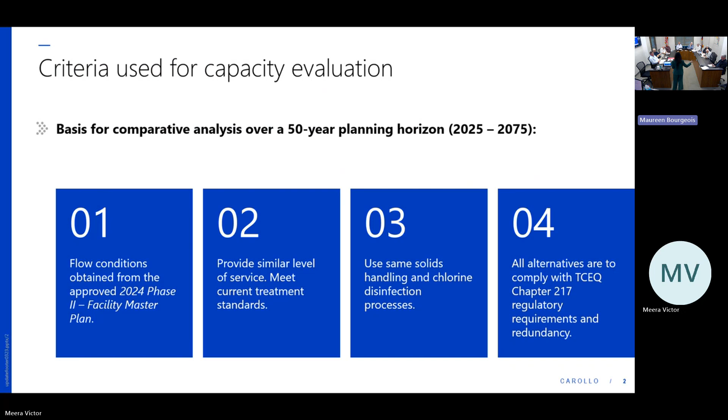Lastly, all alternatives would comply with Chapter 217 of TCEQ's regulatory requirements for redundancy as well as capacity. I also wanted to make sure everyone understands all four alternatives are being looked at on the basis of a 50-year planning horizon, from 2025 to 2075, for each alternative, from alternative one, which is repair in place, to alternative four, which is the MBR option.

Let's talk a little about the applicability of Rule 217 -- I know there were questions on when it applies and when it does not. This comes directly from TCEQ Subchapter A, Rule 217.1: treatment units that are altered, constructed, or re-rated with plans and specifications received and approved by the executive director after the effective date, which in this case was August 28, 2008, of the amendments to this chapter -- the 217 chapter.

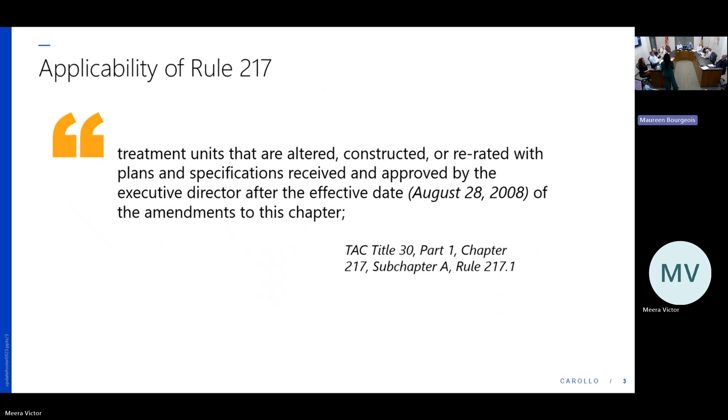And what does alteration or 'alter' mean? This is the definition out of TCEQ's Chapter 217.2: whenever you're replacing a treatment unit in a treatment plant, or modifying a treatment unit, whether it's the capacity, the intended function of the process, the mode of operation, or the configuration and design changes -- any of these major design assumption changes automatically triggers Chapter 217 rule implications versus the grandfathered Chapter 317 rule.

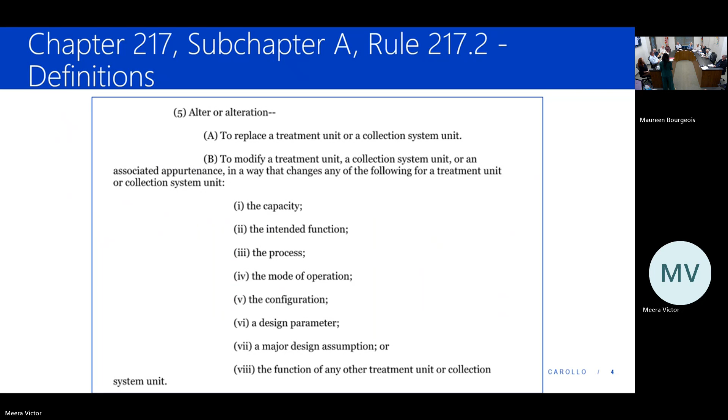So when we started looking at the existing wastewater treatment facility number one, our first task was to assess the treatment plant. There were questions about what the assessment includes. The assessment includes both the condition of each asset at the wastewater treatment facility number one, and also the capacity of each of the assets.

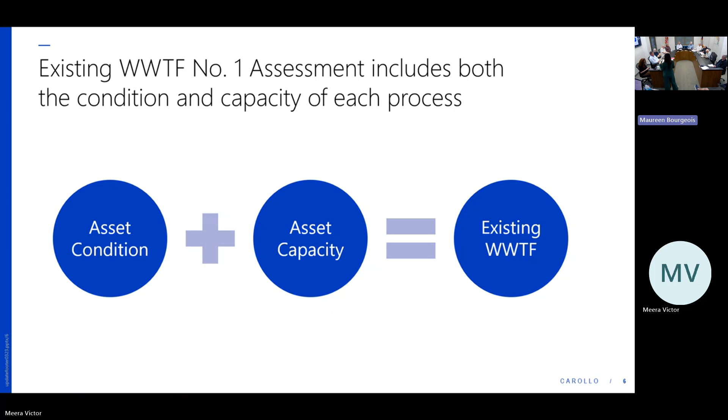When I talk about capacity, I'm talking about both the hydraulic capacity -- basically how much water can move through the plant or each process without submerging the weirs -- and the process capacity of each process area, to make sure the wastewater is getting treated to the right standards as designed by that particular process. So taking into consideration both condition and capacity is what we look at for the entire assessment of the wastewater treatment plant.

So let's first talk about the existing hydraulic capacity of the plant. This graph shows you the historical 2-hour peak flow from January 2016 to January 2025, over the last 10 years. You can see 7 instances where the flows have exceeded the permitted 18 MGD flow for the wastewater treatment plant 1 permit, and 4 times it exceeded over 24 MGD.

On the left-hand side, you see SJRA's letter. Every time there's a flow that exceeds the permitted flow, SJRA is required to send a notice of non-compliance letter to TCEQ. That's an example from the May event, where the flow was 28 MGD at wastewater treatment plant 1 on May 2nd, 2024. That's the letter that went out to TCEQ for the non-compliance.

Historically, as you can see from this graph, even though the average flow at the plant has been 3.1, 3.2, 3.7 over the last 10 years, the current peaking factor -- the peak 2-hour flow -- is 7 to 8 times the current average daily flow. So I wanted to emphasize that the 28 MGD that Freese and Nichols' master plan recommended is a real number; the plant is seeing that high peak flow regardless of the average daily flow. The plant is seeing very high, large peak 2-hour flows.

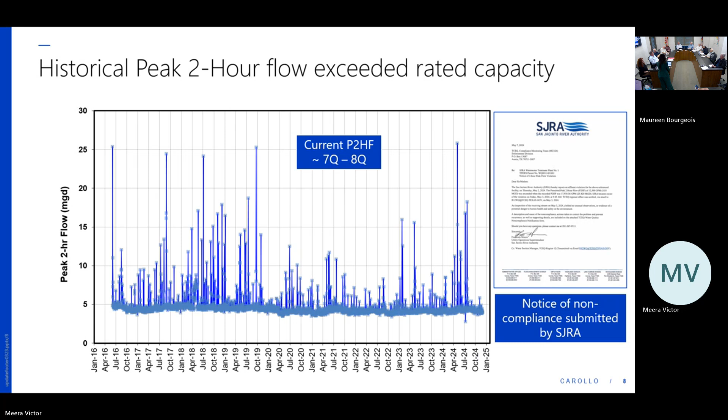So when we look at the hydraulic capacity evaluation, we used Carollo's own hydraulics tool, like any other engineering firm has. We use the hydraulics, which is an Excel-based tool that calculates what the water surface elevations would be as the water moves from the stream.

We start at the back end, the stream, water surface elevation in the stream during a 100-year flood elevation, and walk our way back to the head of the plant. And we follow the flow of the plant.

This table shows you different process units for the wastewater treatment plant and the hydraulic capacity of each of those process units and where the deficiencies are. The last column shows you the order of submergence, or the order of failure, which is the first weir to get submerged.

As you can see from this table, at 15.7 MGD, the secondary clarifier effluent weir gets submerged, which means there is a bottleneck between the secondary clarifier and the filter influent. After that, at 17 MGD, the aeration basin splitter box weir is submerged, followed by 19.3 MGD, the effluent meter, the entire parshall flume is 100% submerged.

So these are the calculations we do to come up with the hydraulic capacity of each of the process areas as the water flows through without submerging the weirs.

What do you mean by order of submergence? Can you explain that a little? So which is the first weir, or which is the first process area that gets submerged?

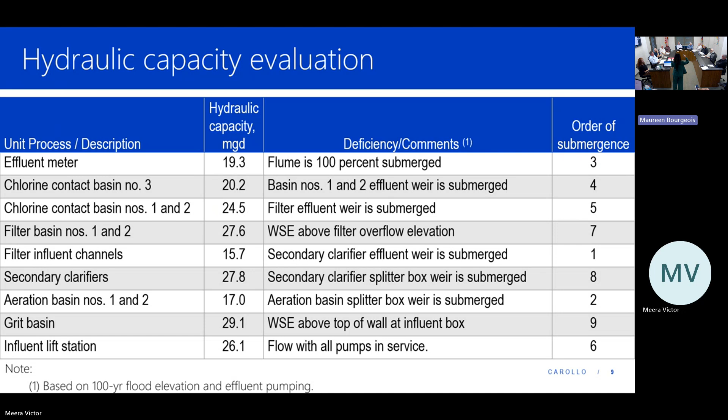That 28, is that a 2-year, 5-year, 10-year average, or what? It is the peak 2-hour flow. Peak 2, but over what period of time? Per day, the peak 2-hour flow at the plant at any given point.

So that was the hydraulic capacity. Now I wanted to walk you all through the existing process capacity, and I'm going to go process by process. There is a lot of data on each of these slides, so bear with me, please.

We'll start with the water as it comes through the raw influent screening, the pre-treatment. That's what it's called in SJRA's CMMS system. It's a mechanical screen, a Headworks International manufactured screen. It was installed in 2013, and it's one screen with a screen opening of 3/16 inch.

The capacity, based on the manufacturer's recommendation and their manual, is 24.1 MGD. That means 24.1 MGD can flow through those screens while effectively taking out the rag that it's supposed to take out.

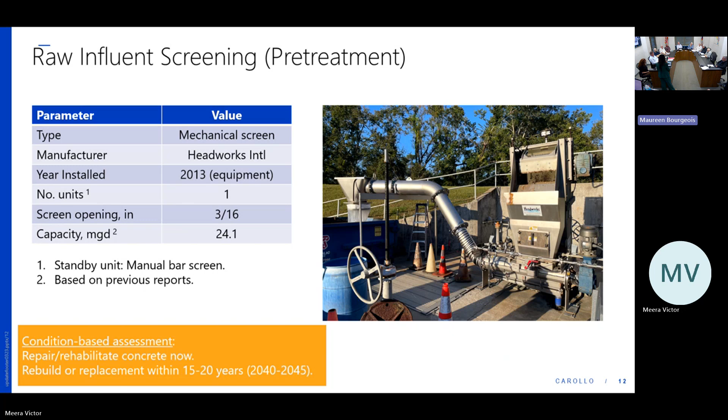Going on to the raw influent pumping, or the lift stations, there are 2 lift stations at the wastewater treatment facility, 1 and 2. They are both non-clog centrifugal pumps. Flygt is the manufacturer. The year installed at lift station 1 was 2001, and the most recent repair done at lift station 2 was 2019.

There are 2 pumps at each of the lift stations, and that's the GPM capacity of each of the pumps, along with the firm capacity of both lift stations together.

When I say firm capacity, TCEQ defines firm capacity as the capacity with the largest pump out of service. What is the capacity of pushing water out of that lift station with the largest pump out of service? The firm capacity of the influent lift station at wastewater treatment plant 1 is 16.1 mgd.

The conditions are shown in the orange boxes. The MCC and VFDs need to be replaced in a 10 to 15 year timeframe. Instrumentation control replacements are recommended within 5 to 10 years, and pump replacement also within 5 to 15 years. We also recommend a performance evaluation on those pumps, because the information we have is based on the O&M manuals and plate data from the pumps, but we do not have drawdown curves for those pump stations. So we recommend that. The plug valve replacement is within 15 years.

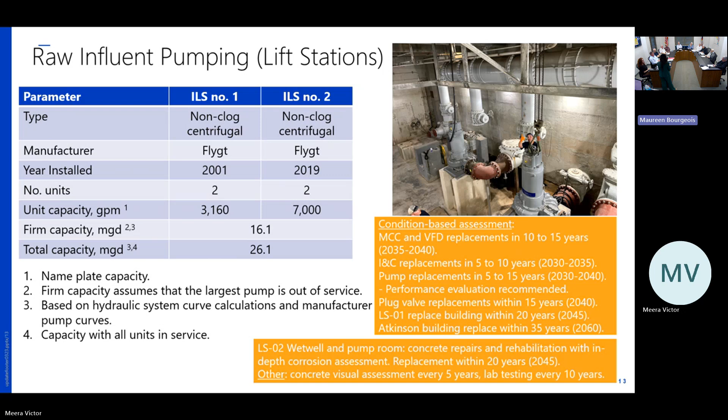The building itself would need to be replaced in 20 years. But as discussed at the All-Mud meeting, the wet well is in very poor shape. We only looked at lift station number 2, but we assume the same is true of lift station 1 because it's a very similar corrosive environment. The concrete repairs and rehab would have to be done right away, and then full replacement would be looked at in 20 years.

For the influent screening and lift station replacement, as you've already heard multiple times, there are extensive concrete repairs needed at the lift station and at the channels of the influent screening facility. We estimate about 6 months of repairs because the plant has to shut down. They have to do scaffolding to go down the deep lift stations, do the concrete repair coating, and concrete needs curing time. So it does take a long time.

While all this is happening, the plant has to stay in operation. They only have one screening facility and lift station, so if they take it down for repairs, they now have to provide bypass pumping to pump directly to the aeration basins.

The existing electrical building, which I mentioned last time at the All-Mud meeting, does not have room for an additional VFD. As you already saw, the existing lift station does not meet the firm capacity needed. So to accommodate that additional pump, you need a VFD, but the existing lift station electrical building has no room for it, so we would have to build an additional building for the VFDs.

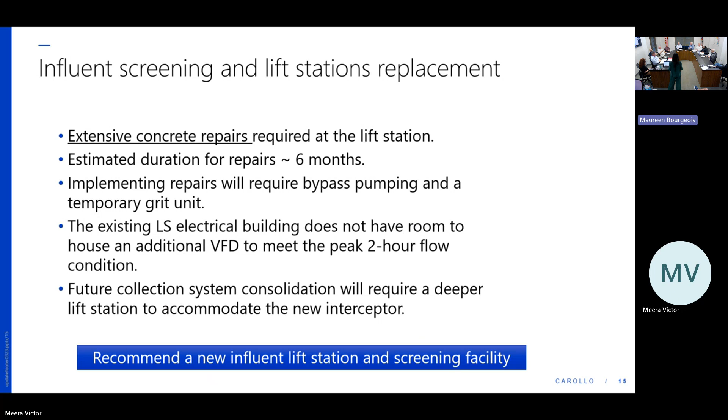Grit removal is a forced vortex system by Smith and Loveless, installed in 2017. There is only one grit basin, which means SGRA cannot take the grit system down for repairs, cleaning, or any maintenance purposes because they cannot shut it down. That is the only unit they have.

The capacity of that grit system is 20 MGD, which means anything over 20 MGD, the water can move through, as we saw in the hydraulic capacity analysis, but the grit will not be removed. Anything above 20 MGD, the grit removal efficiency drops considerably.

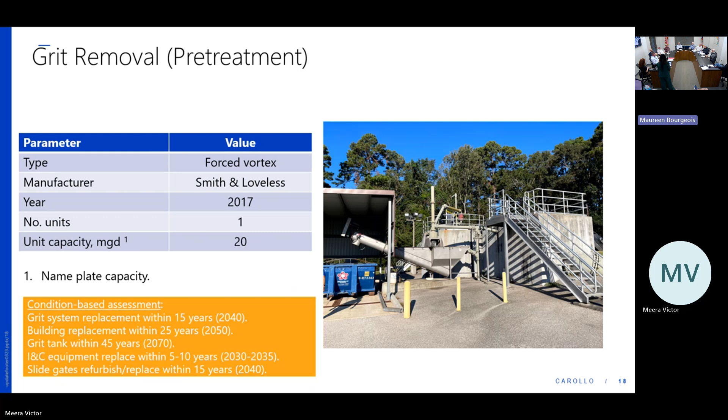For the condition of the grit system, we recommend a 15-year replacement. The building would be replaced in 25 years - that's where the grit conveyor is. The grit tank concrete structure itself would be replaced in 45 years. Instrumentation and control equipment needs to be replaced within 5 to 10 years, which is typical for all I&C components. All the slide gates need to be rehabbed or replaced in 15 years.

As I talked about, the hydraulic capacity allows the grit system to move water through, however it cannot remove grit efficiently above 20 MGD. So there is a gap in the capacity. When you're moving 20-plus MGD, you're under some kind of event - is grit picking up or going down? Usually grit goes down, and at high flows you'd see a reduction. Our recommendation for adding a new grit system, a second basin, was for redundancy purposes, because right now they cannot take down the grit system for any O&M purposes.

How do they handle that now? Since they can't take it down, they must have a way.

We take it down and bypass - we let all the grit just go through the pipes and the pumps and settle out in the basins. There's a bypass valve you flip, with piping to go around it, because it's inevitable - something's going to happen, it's mechanical. As the grit goes through all the pipes, it causes erosion, so through the pumps and the basin, they have to clean it out.

So we are recommending a new second grit system as part of this study for the existing plant, again for redundancy purposes.

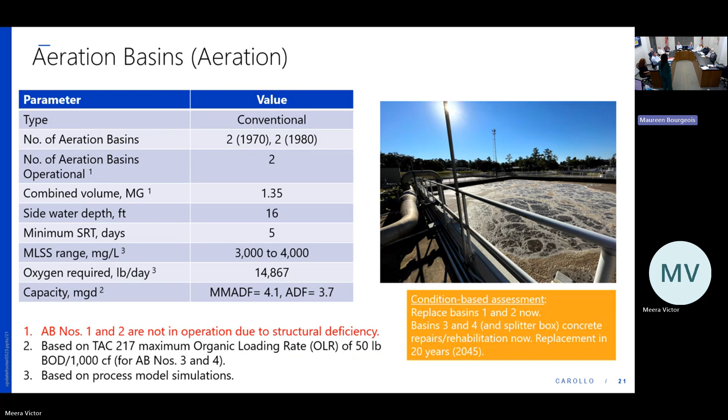They've been out for a while. So how are they meeting current capacity if 1 and 2 are down? They're meeting capacity because the flows are lower, at 3.1 MGD average flow. So the plant isn't meeting the capacity to handle 7 or 7.8 MGD. If the flows go anything above 3.7, they would have challenges at the plant.

The aeration system uses multi-stage centrifugal blowers at aeration basins 3 and 4, by Lamson. There are 3 aeration blowers. The unit capacity at about 7.5 PSI is about 4,000 SCFM, which is the flow rate of air, and the process air required is about 8,000 SCFM.

This is based on the existing diffuser in our modeling, since they currently have ceramic disc diffusers in basins 3 and 4. The current aeration system for 3 and 4 is sufficient for those basins, but for aeration basins 1 and 2, when they are replaced, we will need additional blowers.

The MCC at the aeration basins needs replacement in 10 to 15 years. Electrical replacement within 15 years. Instrumentation and control within 5 to 10 years, and the blower and motor for aeration basins 3 and 4 would be within the next 20 years.

When was the last time 2 was run? Aeration basin 2 was operated, have you... say that again. When is the last time aeration basin 2 was operated? Probably the same time 1 was. They were both taken down around the same time, 10 plus years.

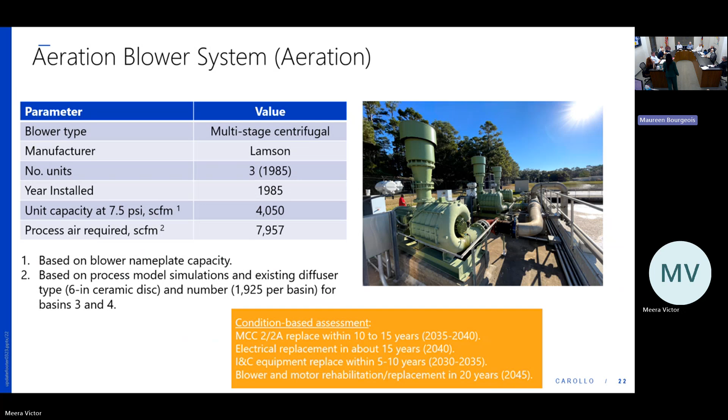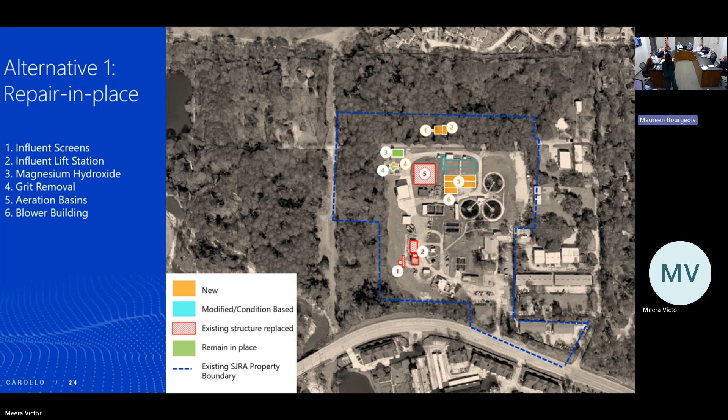This is the site plan showing the aeration basins. The red box with checkered hatching, number 5, is the existing aeration basins 1 and 2. That would be replaced by the new basins shown in orange, also number 5, along with a new blower building for aeration basins 1 and 2.

Moving on to secondary clarifiers, there are circular clarifiers, 3 of them, by Envirex, the manufacturer. 2 clarifiers were installed in 1982 and 1 was installed in 1994. All 3 are 87 feet in diameter with a side water depth of 10 feet.

When we do our process calculations, we look at several different ways to calculate the peak 2-hour flow capacity through the clarifiers. First is the hydraulic retention time, HRT, of 1.8 hours. The peak 2-hour flow capacity using HRT based on TCEQ's chapter 217 is 17.3 MGD. The peak 2-hour flow using the surface overflow rate of 1,200 gallons per day per square foot of the clarifier is about 20.8 MGD.

However, because they both were lower than what our desired 28 MGD was, we looked at the state point analysis, which looks at the SRT, the solids retention time in the clarifiers, and we came up with 21 MGD capacity of the clarifiers.

The condition-based assessment: the I&C equipment have to be replaced within 5 to 10 years. The butterfly valves within 5 years. The concrete repairs, as was talked about in the last presentation, need to be coated and repaired for all 3 clarifiers. The full clarifier replacement would be done for the 2 that were installed in 1982 in 20 years, followed by the last, newest clarifier in year 2065.

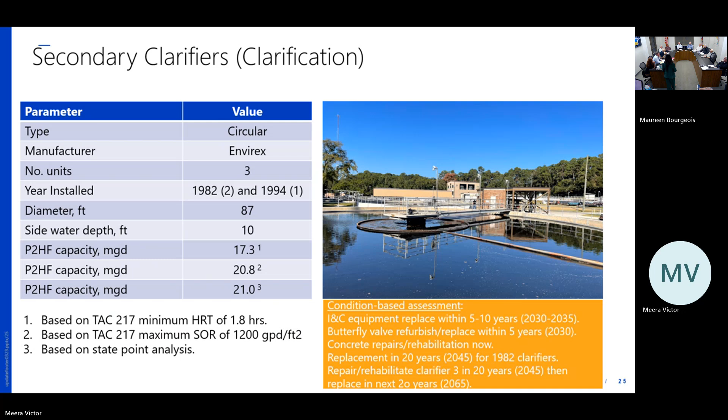There are also RAS pumps associated with these, the return activated sludge pumps associated with each of these clarifiers. There are 4 pumps, self-priming centrifugal pumps by Gorman-Rupp. Each pump capacity is about 1,600 gallons per minute. They were installed in the 1980s.

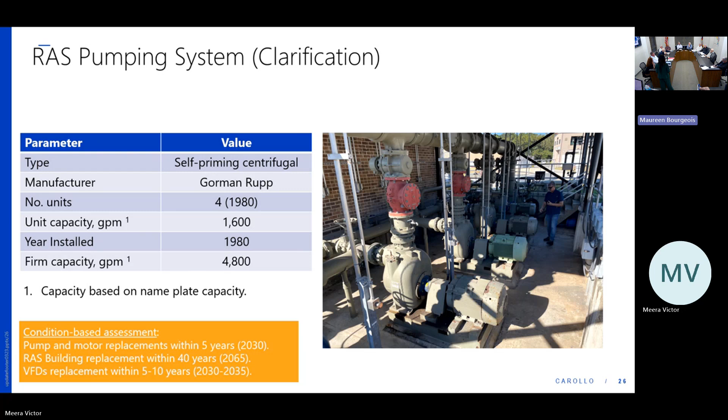The firm capacity, with the largest pump, in this case all are the same size, so with one pump out of service is 4,800 GPM. The condition-based assessment: the pump and motor replacements are within 5 years since they were installed in 1980. The RAS building itself is 40 years and the VFD is within the next 5 to 10 years.

The filters: there are 2 filter basins, cloth media filter basins by Aqua Aerobic. They were installed in 2015. The basins themselves were constructed in 1980. The loading rate, gallons per minute per square foot of the filter media, is about 6.5 GPM per square foot. The peak 2-hour flow capacity per basin is 17 MGD.

The firm capacity, meaning with one basin out of service, the firm capacity of the filters we are looking at is 17 MGD. And the hydraulic capacity, as I talked to you guys about in the hydraulic capacity section, the hydraulic capacity of the filters is less, 15.7 MGD, than the process capacity because of the filter weir, influent weir being higher.

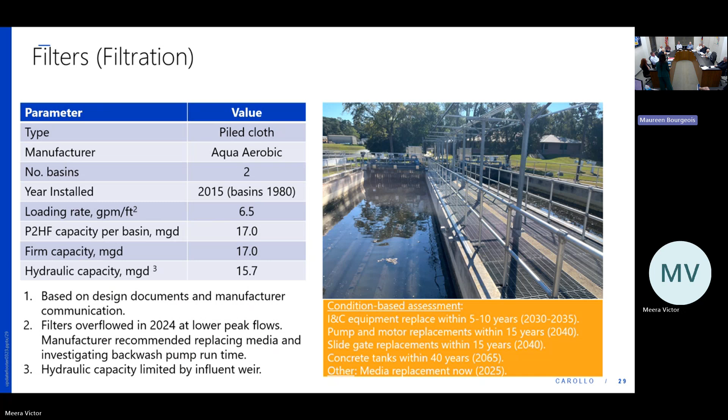The last part in the liquid process is the disinfection system. It's a chlorine contact basin used, SJRA uses chlorine gas to disinfect the treated wastewater. There are 3 basins, 2 installed in 1995 and 1 in 2004, with a combined volume of 0.27 million gallons. The side water depth of basins 1 and 2 is 10 feet, and chlorine contact basin 3 is 9 feet. The peak 2-hour flow capacity of the chlorine contact basins with all 3 basins is 19.7 MGD, using a contact time of 20 minutes, which is the required contact time needed for the water to be in touch with the chlorine gas.

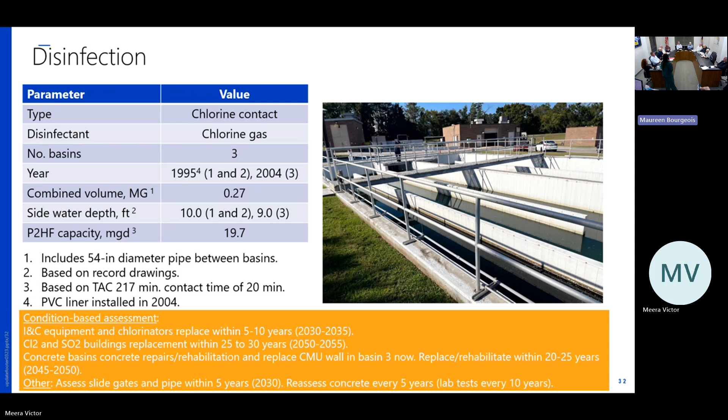The PVC liner was installed in 2004, but as we talked through in the last presentation, there are some serious concerns in the chlorine contact basin structurally. So we do need to do those concrete repairs and replace the baffle wall that we showed last time as well. The buildings would need to get replaced within 25 to 30 years, and the instrumentation and control equipment within 5 to 10 years.

Effluent meter, which is the final one - this is where the Parshall flume is, a 36-inch wide throat Parshall flume ultrasonic meter, with a flow capacity up to 32.6 MGD based on the record drawings we have for the facility. Again, as discussed in the last assessment meeting, there is some exposed aggregate in that Parshall flume. So we would recommend repairing that concrete now, with full replacement within 35 years.

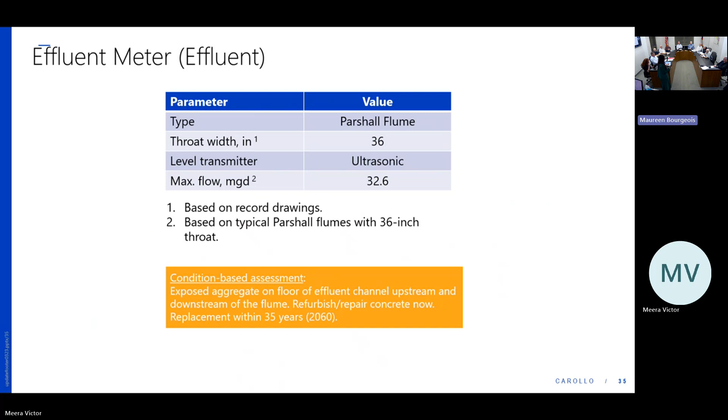Going back to the slide, the maximum flow is 32.6, so the flow can go through it. However, we do not have the right data to measure it accurately - it will process, you can push through it, we just don't know accurately how much water is going through it, because the downstream level has also risen. So we are again just talking about repairing the concrete at the effluent meter.

The storm pumping, or effluent pumping - there are two outfalls as you already know, with vertical turbine and centrifugal pumps. There are 6 pumps at outfall 1 and 2 at outfall 2. We do not have a lot of information on the outfall 2 pumps, but we do have the nameplate capacity for the outfall 1 pumps, which are 5,000 GPM each. Based on condition assessment, we are looking at replacing the pumps and motors within 5 years, the blower and motor within 5 years as well, I&C equipment within 5 to 10 years, and the basin, the Parshall flume itself, within 35 years.

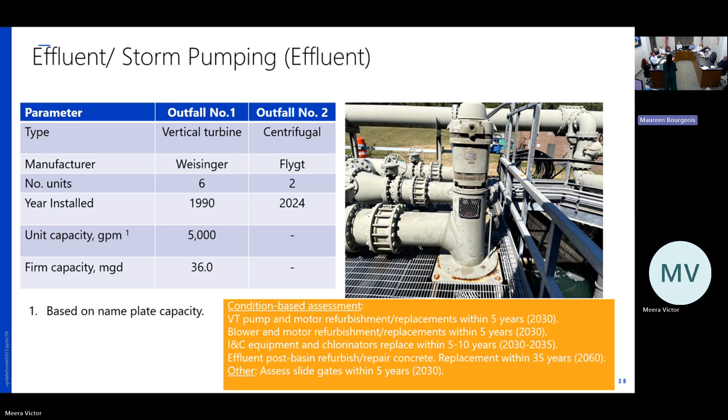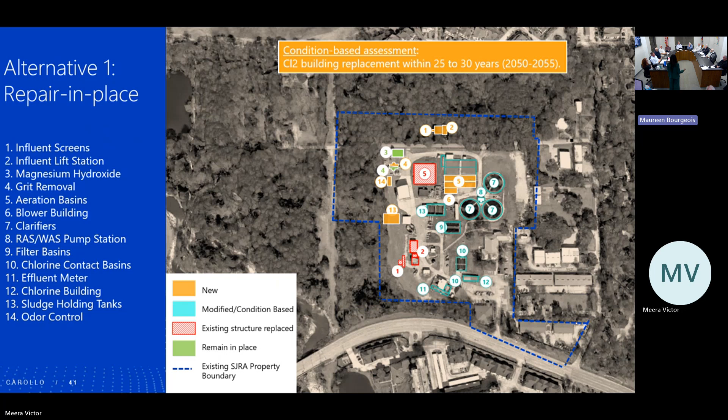So based on the HRT of 4 days that is SJRA's current criteria, number 13 is the repair of the existing concrete, but we do need to add another sludge holding tank to meet the HRT of 4 days for SJRA. Can you go back to that slide?

Help me understand peak flow, the 2-hour peak flow, but you're saying that peak flow is going to last for 4 days? No, currently SJRA uses a 4-day storage time. Is that correct? Based on our model. Yeah, so here the difference is this is the wide spot in the pipe for SJRA, in terms of they have to put the sludge somewhere before it goes to dewatering. And the sludge production sometimes outpaces the dewatering, so they need this amount of time for the sludge, so it's divorced from the flow - this is just based on the sludge flow.

By the way, this is Toshio Shimada. I apologize, I didn't introduce him, but Toshio is our process expert. He ran the BioWin model to run all these process calculations.

Normal operation at a facility like this? Yes, whenever you have dewatering, because you can't push all the solids through the dewatering, you do have a wide spot in your system to hold sludge. But that's a tank, that's nothing? It's a tank, it does have diffusers and blowers to keep it aerated, because otherwise it goes to anaerobic conditions and that would not be good.

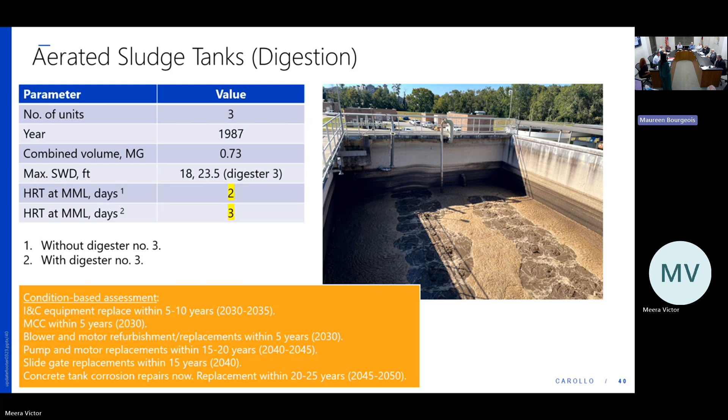And I apologize again, this is all work in progress all the time. So there might be some questions that you all asked that I may not have answered today, but we are working through that process. Eric, could you get a copy and send it to us? We can, I will email you the copy tonight.

Again, the site plan showing you the sludge holding tank as well as the odor control system that would be needed. The chlorine building we already talked about, that would be replaced within 30 years. It does not need to be replaced currently.

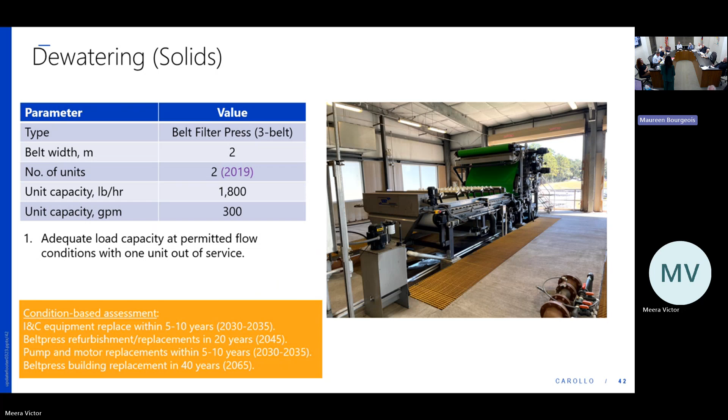So that is adequate capacity to handle the flows we are talking about for the solids generated by this plant. So we do not need to make any process changes or add any additional belts at the solids building. But condition-based, again, you would need to replace all the mechanical and I&C equipment within their 5 to 10 year or 20-year timeframe, and the building itself within the next 40 years.

This is again showing you the dewatering building. We are noting some repairs in the building itself, but nothing major. And then the Cl2 building that would get replaced in 25 to 30 years as well. Again, no major changes at the Cl2 building either. So some other condition-based replacements that we haven't talked through in each process area are these buildings.

The process water system that was installed in 2000 needs to be replaced within the next 5 years - the process water MCC, not the process water pumps themselves. What's the MCC, sorry? That's the motor control center. So the electrical MCC needs to be replaced within the next 5 years.

The process water multipurpose building - this is probably one of the worst buildings at the site. Foundation issues, a lot of challenges, significant cracks. We truly recommend that building be replaced within the next 5 years.

It's underground, below ground. The process water pumps and motors need to be replaced or rehabbed within the next 10 years. Storage buildings, again, we need to reassess in 5 to 10 years and potentially replace within the next 45 years. Similarly, the fuel system and the SCADA shop - reassess - and the main switchgear need to be reassessed in 5 years, with potential full replacement within the next 35 years.

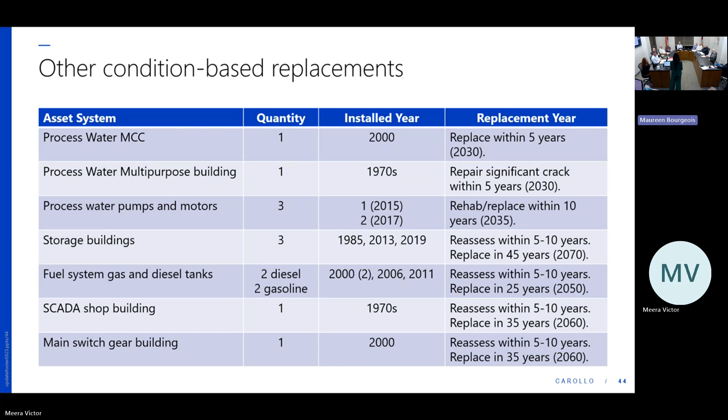It's a condition-based replacement. The other four, the secondary clarifiers, filters, chlorine contact basins, and the effluent meters, all require additional capacity. How you achieve them - one of the examples you saw last time was adding two additional clarifiers, associated RAS pumps, filters, and chlorine contact basins.

This assumes that there was no peak flow storage. We somehow need to push that flow through the plant and meet the treatment at the permit capacity or the permit limits. So let's go back - can I finish my thought? Okay, and then we can go, and if you have questions, let me just finish my thought.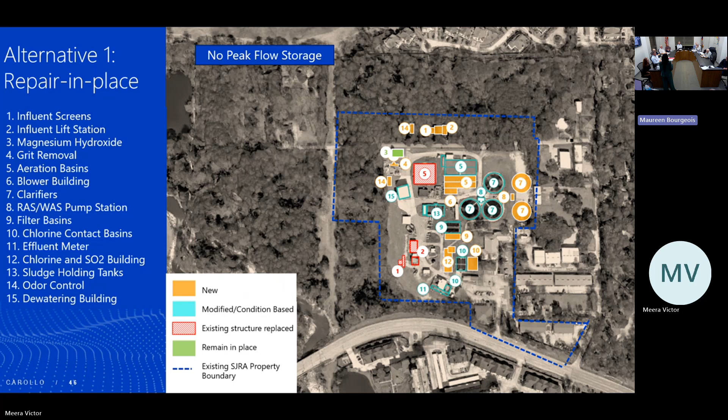And the benefits of providing the peak flow storage tanks: one, it optimizes your treatment processes - all the secondary treatment, the filters, the disinfection processes - and you don't have to upsize them by adding additional facilities for events that only occur once or twice a year.

The existing clarifiers, filters, and chlorine contact basins, if you do provide peak flow storage, would be grandfathered into your chapter 317 and not have to re-look at chapter 217. The third advantage is that there would be no need to modify your discharge permit.

You could stay at your 7.8 MGD permit with 18 MGD peak 2-hour flow and just store that water at the site. And it provides SJRA staff, the O&M staff, the ability to handle the peak flows without incurring a permit violation or stressing the plant out during those cases.

The biggest disadvantage, and it is not an easy thing for the plant staff, is they do have to clean these tanks out after each time. So you can imagine when that raw wastewater comes in, it's going to be full of gunk, full of trash, rags. And so after every use, they would need to go in and clean it. That's one of the biggest disadvantages.

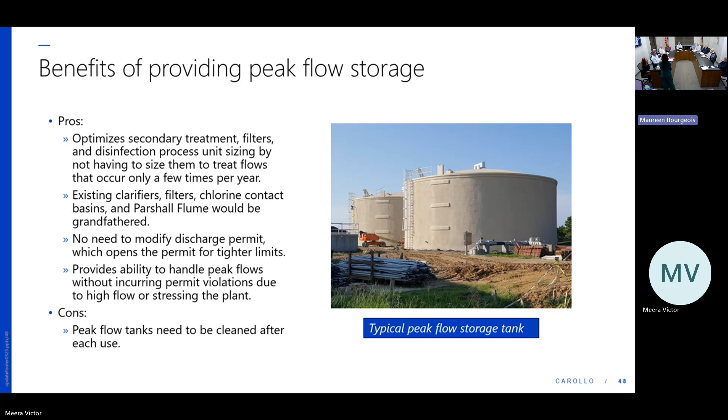If you go back to your previous bar chart - yeah, that one. So the 28 is still an artifact of triggering 217. The 28 MGD is based on what the plant is seeing, if you saw that flow graph. But it's not a requirement, it's not a permit requirement.

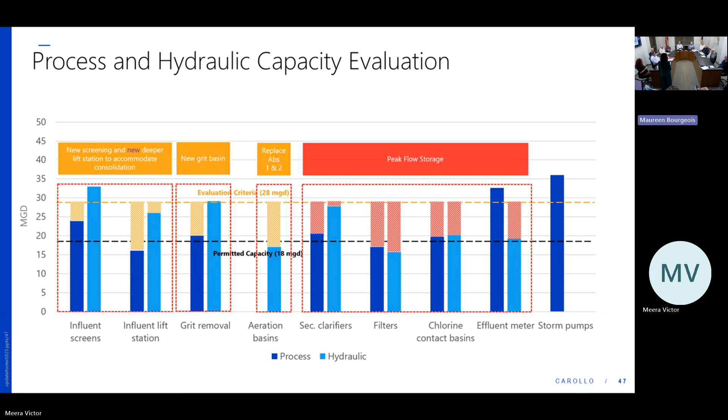When you do a design, I would assume they would go through a proper design and layout for where the tanks go. Just to keep in mind, right now the blue boundary is the existing property boundary. These tanks, the lift station, and the screening facilities are just south of the northern boundary. TCEQ requires a 150-foot buffer around any process areas, and that would count, so you would need additional land.

So again, you would have to lay these out during design. To the right, that area, Ed, you were able to get some land. So how does that fit into that picture up there? One of the tracts is 1.5 acres north of that blue line, or above it in this case. It does not cover the whole area, but we have identified other tracts above that blue line that also need to be acquired.

And those are on hold until we can get a path forward. So there's a way to structure this to make an investment in which we retain the value of what we spent. That's correct.

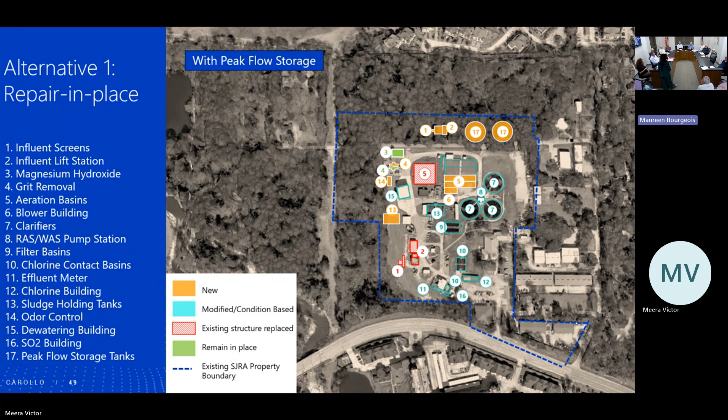Question: the volume of these storage tanks, is there an estimate of that? It was 1.25 million gallon tanks, each. How many acres? How big is a 100-foot diameter tank? It's about 100 feet in diameter each tank. It barely fits in 1.5 acres.

Barely fit, 1.5 acres. Yeah. Early on, you described the submergence sequence, right? I think in one of the early graphs you went through all the details of each process. Has the plant's operational experience validated that technical evaluation you did? Does it match up with reality pretty well?

So I was asking Chris earlier about the 3 existing clarifiers, have we ever overflowed the concrete? He said no, we came close 3 or 4 times out of the storms that Mira had. So we did verify with the plant staff. Every time we run a model, the model will say something, but we want to make sure it's verified, so we talked to the operations staff to confirm there were no submersions. Okay, I figured as much, but thank you.

Okay, I want to get back to this permit, the chemical permit allowables, talk about BODs and nitrogen, ammonia. Basically, we've had no permit violations in 5 years, right? Okay, permit violations aside, it's my understanding, and I think Murray brought it up in our meeting, and I was surprised.

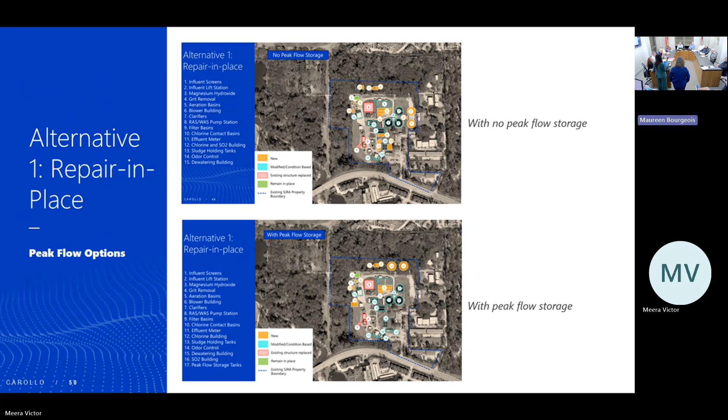All right. I know it's been a long night for you all, and thank you so much, thank you very much for your insight. But I do want to talk through quickly.

There were some questions asked on the net present value analysis assumptions. What assumptions are we using? I will be honest, I'm not a financial lead. I have an entire finance team, they are not here today. So when we show you the entire analysis, they will be here to talk through that. But I wanted to quickly go through some of the components we would be using in our analysis.

First is the discount rate. The discount rate is calculated using two parts. First is the 20-year treasury rate, which is a risk-free rate on risk-free or low to no risk investments. And the second is the equity risk premium, which is the expected rate of return above the 20-year treasury rate. So we looked at the current 20-year treasury rate, which is at 4.82%, based off of April 15, 2025. And then the equity risk premium is currently at 5%, from the March 2025 update. So when you add those two up, the discount rate is 9.82%, which is what we are planning to use in our analysis.

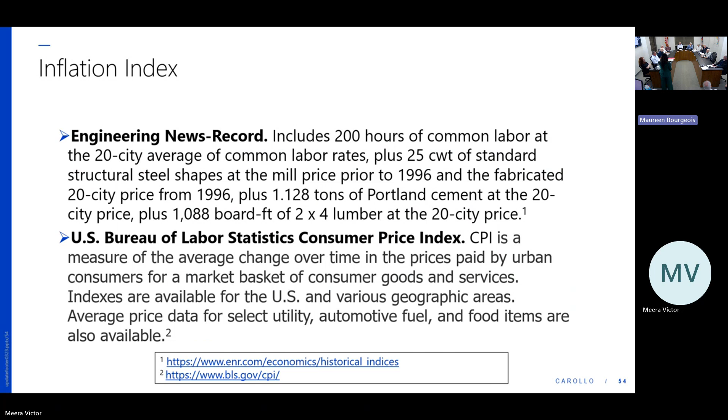Does that track the recent history of wastewater treatment plant costs in the last 5 to 10 years? It seems low. Considerably low. But we are not, after COVID, it just jumped - it escalated very high. We are stabilizing, but we're not there yet, 100%.